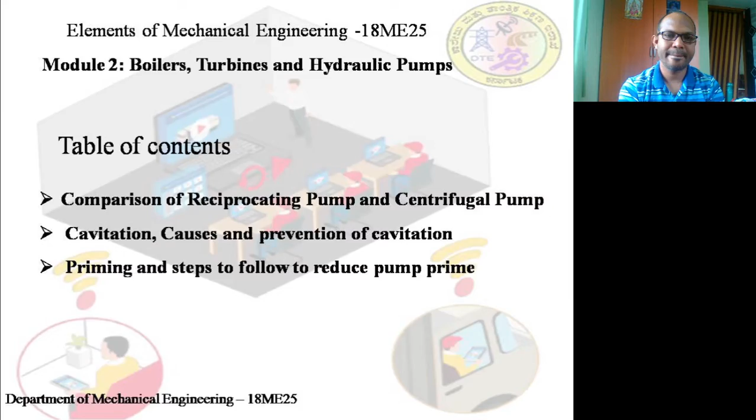So this presentation contains the comparison of a reciprocating pump and centrifugal pump. It will also have the cavitation effect, causes and prevention of cavitation, priming and steps to follow to reduce the pump primings. So these are all the things we are going to discuss in this session. We've also studied basically how this principle for centrifugal pumps works, as well as how this reciprocating pump works. So keeping that in the mind, let us

go step by step. The first point is, in the centrifugal pumps, we have got a steady and even flow. That means there will be a steady flow. That means flow doesn't change with respect to the time. There will be continuous flow. Whereas here in the reciprocating pumps, an intermittent or a pulsating flow will be there. That means the flow will change with respect to the time. That means flow keeps changing.

It will be a pulsating one, because common sense says that if a wheel is rotating, it will be rotating continuously. So as long as it is rotating continuously, the water will also be pumping continuously. As the piston moves front and it comes backwards, it moves front and it comes backwards. So now here it is not so rigorous or continuous. And the point to be noted here, when the centrifugal pump's impeller rotates, continuously the water will be sucked.

Whereas here, when the piston is moving towards the left, in a suction stroke, it is not pumping the water, it is just sucking the water. Then when the piston moves towards the other end, then only the compression takes place and the pressure of the fluid increases, then it will pump it. So out of two strokes, during only one stroke the pump will generate the pressure.

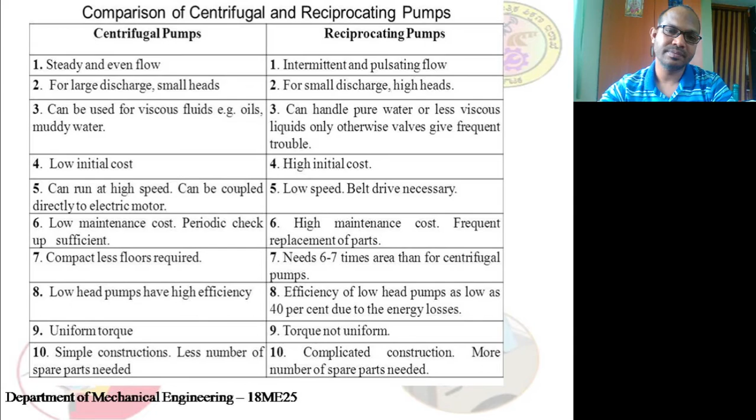Now let us talk about one of the important factors, that is cavitation. Cavitation is nothing but the formation of bubbles or cavities in liquid, developed in areas of relatively low pressure around an impeller. The imploding or collapsing of these bubbles triggers intense shock waves inside the pumps, causing significant damage to the impeller or the pump housings.

Okay, now actually what happens here is, I don't have the figures over here. Now whenever the suction is created in order to take the water from the sump, the pressure which has been created is good enough for the water because water is heavier. Its density is 1000 kg per meter cube.

It is heavy. So in case of leakages, or in case of failure of any sealing material, or failure of the foot valve, or the strainer, what happens? Air may come into the passage of the suction valve or the suction pipe.

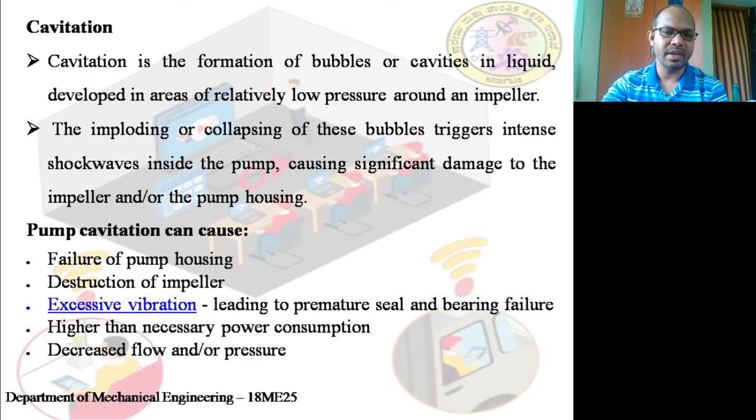Higher than necessary power consumption, that means power will be consumed more than the required power. Okay, decreased flow rate and pressure: there are chances of a decrease in the flow rate and a chance of a decrease in the pressure also. Okay, now cavitation prevention. If your pumps are experiencing cavitation, check these things to troubleshoot the problem on your own. Okay, how to check this cavitation? How can we identify this?

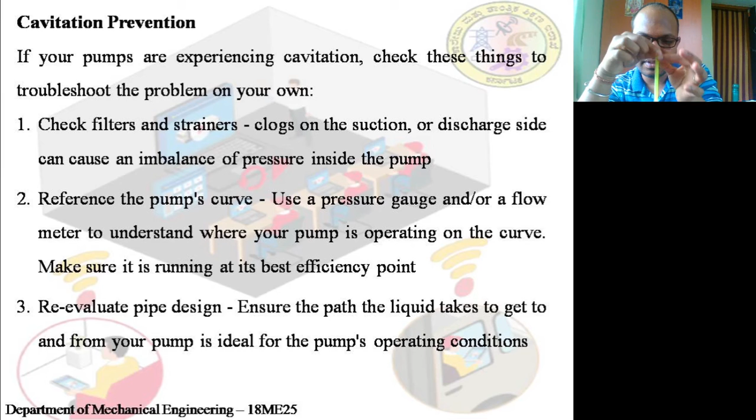Check filters and strainers. Filters and strainers are always placed at the bottommost portion of the pipe, which has been immersed in the sump. The sump pipe, this is a suction pipe. At the end of the suction pipe, we will have a strainer and filters. Clogs on the suction or the discharge side can cause an imbalance of pressure inside the pump.

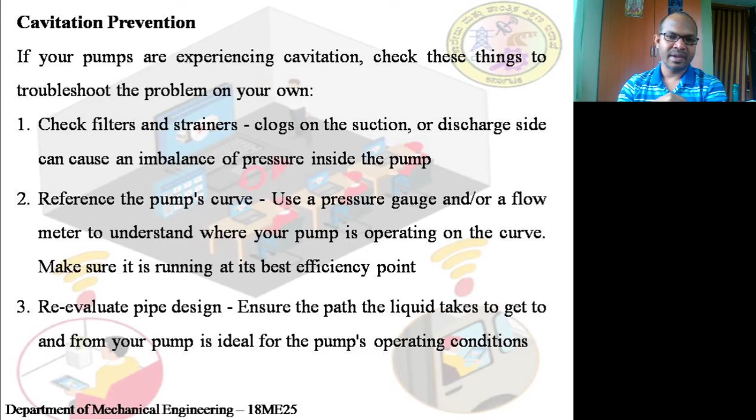Reference the pump's curve. Use a pressure gauge and/or a flow meter to understand where your pump is operating on the curves. Make sure it is running at its best efficiency point. Okay, re-evaluate pipe design. Ensure the path the liquid takes to and from your pump is ideal for the pump's operating conditions. So then, how can you overcome these cavitation problems?

Cavitation problems can be overcome with a process called priming. Then what do you mean by priming? Priming, you might have already observed people doing this, but you are not aware that this is called priming. Okay. Now let me tell you what priming means. Priming is the process in which the impeller of a centrifugal pump gets fully submerged in liquid without any air trapped inside. Is that clear? This is especially required at the first startup. It is always advisable to start the pump only after priming.

For a centrifugal pump, priming is required only when the elevation of liquid in the suction tank is less than the elevation of the pump. A centrifugal pump cannot suck the liquid, but it pushes the liquid more. The liquid enters the suction of the centrifugal pump by the energy it possesses, atmospheric pressure in the suction tank. A pump's casing must be filled with fluid before starting. Now, we have come across how we can identify that the pump's performance is being decreased by cavitation, and this cavitation can be overcome by the priming process.

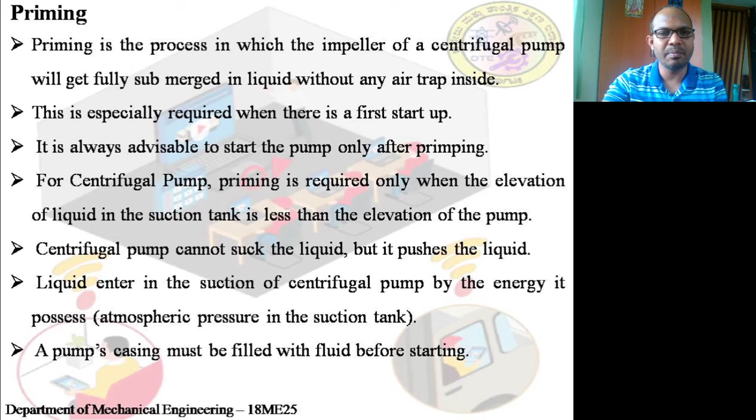Please be careful. Okay, now you will replace the air by this water and we will close it. Then we will start the pump. Then, 99% of the time, the complete air will come out and it will be filled with water, so that there is no problem. The pump will start pumping the water continuously. This process is called priming.

As you can see here, no need of priming as the impeller is running in water. If the impeller itself is in the water, then no need for priming. Priming is required as the impeller is running in air. Now this is what is happening in the second case. This is how our domestic pumps are working in our homes.

These pumps are placed in the air. So there may be some leakage or entrapment of the air. So what we will do is, we will open this place at some point above this impeller, and we will fill this completely with the water, so that the air will be displaced. Air will be taken out of the impeller or the pump itself. So it will be completely filled with water. Then we will start the pumps and it works effectively. This is the idea behind this.

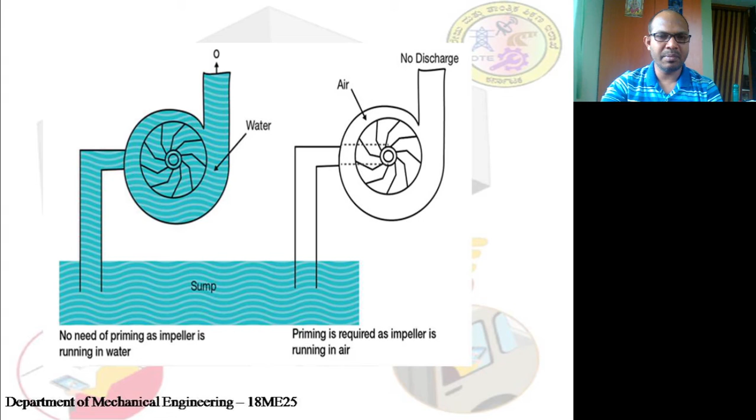If not, the pump will be unable to function. If vapor or gas exists inside the casing, the pump will become gas bound and won't pump at all. It is something like, as I have already told you, a straw. You're drinking some juice, and if you have a straw with a number of holes, what happens? The air will come inside rather than the water or juice. So can you suck it effectively? No. The same thing will happen for the pump also.

Is that clear? If you close the holes or if you remove the air gaps, then you can suck the water or liquid or juice effectively. This is a small common sense. Okay, if vapor or gas exists inside the casing, the pump will become gas bound and won't pump. Priming is the action of filling the casing with a fluid before the startup. This is called priming.

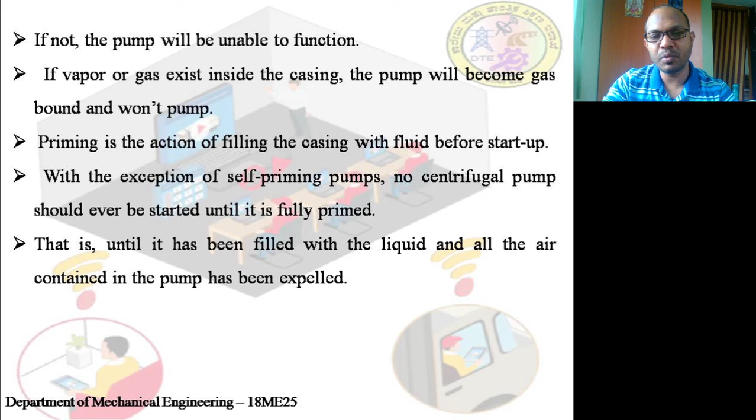With the exception of self-priming pumps, no centrifugal pump should ever be started until it is fully primed. This is the first concern or care we should be taking. That is, until it has been filled with the liquid and all the air contained in the pump has been expelled, we are not supposed to start the pumps. Okay.

Steps to take if the pump is losing its prime. Check for leaks. 90% of all pump problems occur on the suction or intake side of the pump itself. So ensure that the pipe connections threaded into the housing are tight and that the intake line is not cracked or has any loose or poorly glued fittings, because pipe water fittings we always glue with some gum and then we fit it, right. Make sure that everything is tight.

Then valves. Most of the time this all happens only at the suction end, so enough care should be taken in the suction itself.

Valves: most pumps are equipped with foot valves, that is what I just told you, which have been placed at the end of the suction pipe to keep water in the intake line and casing when the pump is not running. If your foot valve is leaking, your pump may lose its prime between starts. Replacing a faulty valve may solve the problem.

That is okay. Then the obstruction. One possible reason your pump may be losing its prime is an obstruction or blockage in a line. Debris blocking the suction strainer or a foot valve. Debris means it may be dust particles, sand particles, or some leaves or any sediments which are there in the water or in the liquid, which may come and block the strainers.

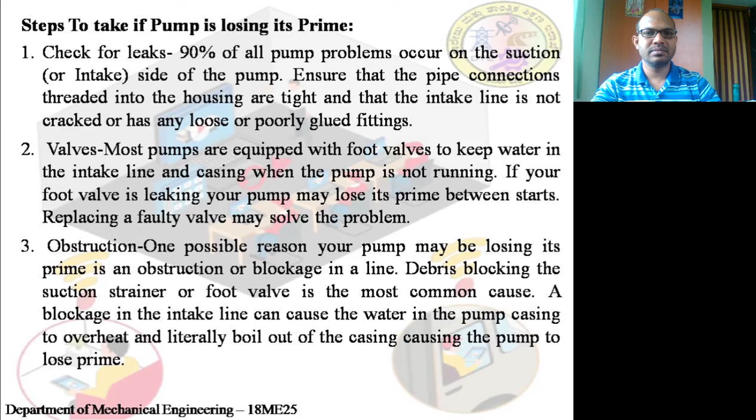A blockage in the intake line can cause the water in the pump casing to overheat and literally boil out of the casing, causing the pump to lose the priming. So these are all the important factors to be considered when the pump is losing its prime.

These are a few assignment questions. Distinguish between reciprocating and centrifugal pump. What is cavitation? State the problems caused by cavitation. What is priming? Explain the phenomena with simple sketches. What are the different steps to be followed when the pump is losing its prime? This is one of the important questions actually.